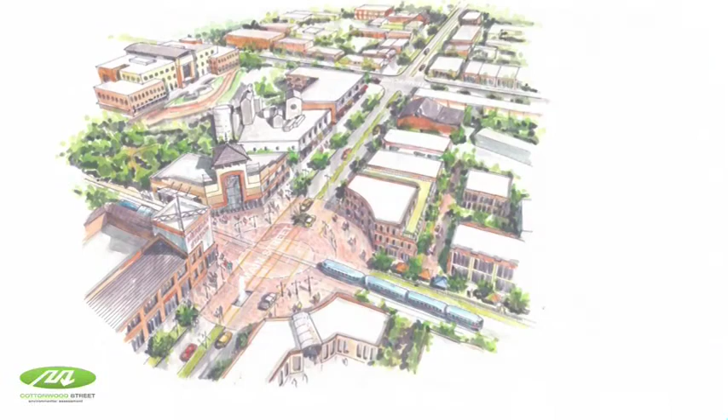Our downtown is such an important area of our community, and making efforts to improve and enhance the downtown is our goal in the upcoming years. We are focusing our redevelopment and economic development efforts on an area we are calling the Murray City Center area. We are proposing zoning changes to generate redevelopment in order to create an area with greater density that is a civic and cultural center for our community.

To determine the best route to take to make the connection, the City of Murray, UDOT, and the Federal Highway Administration are conducting an environmental study to examine alternatives and determine which will best serve the transportation needs of the city. The study is a 14-month process that started last September and is scheduled for completion later this year. Tonight, you'll be asked to examine 7 different alternatives and express your opinion on which of the alternatives best serves the transportation needs of the community.

The transportation objectives are: 1. Improve connectivity and reduce travel distance between the city's future city center district and the Intermountain Medical Center, TRAX light rail stations, and a future FrontRunner commuter rail station, the Fireclay development, neighborhoods on Box Elder and Hanauer Street, and the more than 100 businesses in the study area.

2. Improve access to commercial properties in the Murray City Center District. 3. Provide a safe, comfortable, and pleasant cycling and pedestrian route between major destinations. In evaluating each alternative, the study team is taking into consideration impacts to neighborhoods, historical properties, noise, pedestrian safety, and how best to enhance traffic movements in the study area.

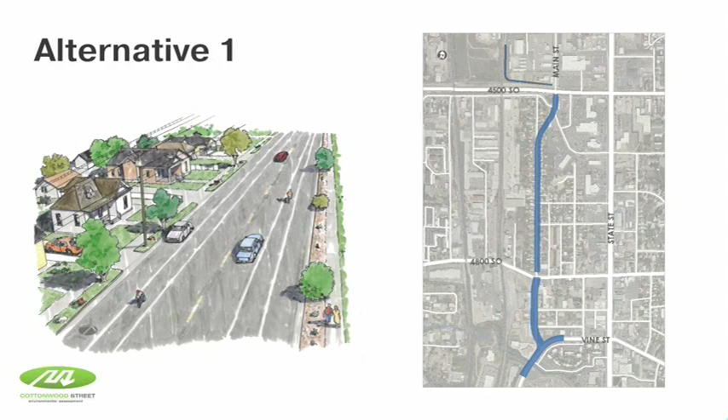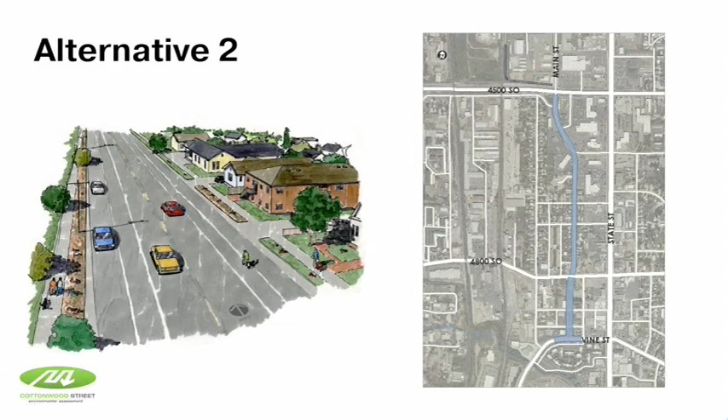Alternative 1 is a 3-lane roadway along the existing Box Elder Street alignment, with widening to the east side of the Box Elder residences. A majority of the homes on the east side of Box Elder would be relocated with this alternative. Alternative 2 is a 3-lane roadway along the existing Hanauer Street alignment, with widening on the west side of Hanauer Street. A majority of homes on the west side of Hanauer would be relocated with this alternative.

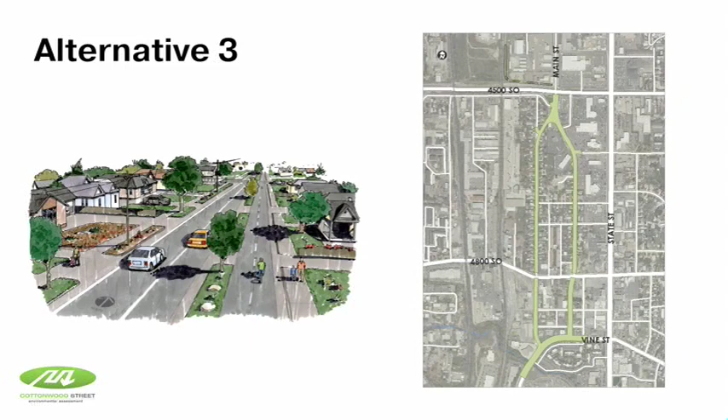Alternative 3 is a one-way roadway pair, also known as a couplet, using the existing Box Elder and Hanauer alignments. This alternative stays within the existing rights-of-way for most of the residential area and has the least amount of relocations. Alternative 4 is a 3-lane roadway along the new alignment that runs between Box Elder and Hanauer Streets. Several property relocations would be required with this alternative.

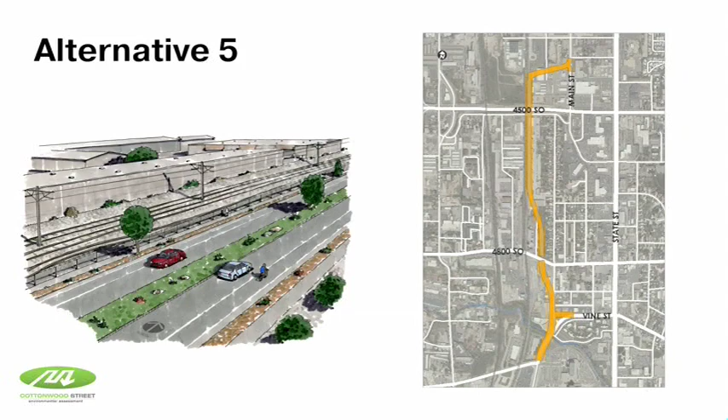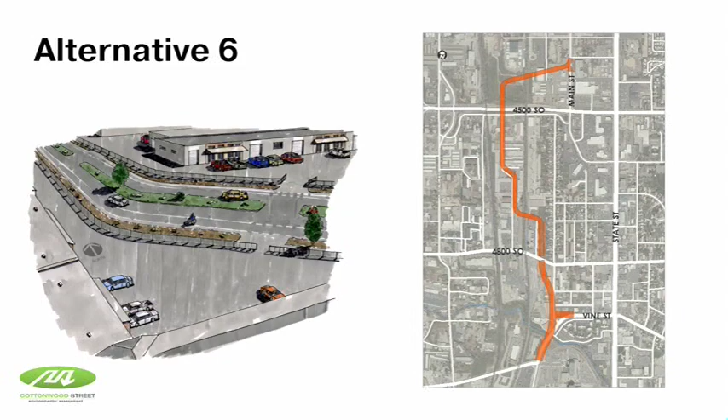Alternative 5 is a 3-lane roadway that runs along the east side of the railroad tracks with impacts to the commercial district. This alternative would require a bridge at 4500 South and would impact the railroad tracks. Alternative 6 is a 3-lane roadway that runs along the west side of the railroad tracks with impacts to the commercial district. This alternative would require 3 new bridges, 1 at 4500 South and 2 over the railroad tracks.

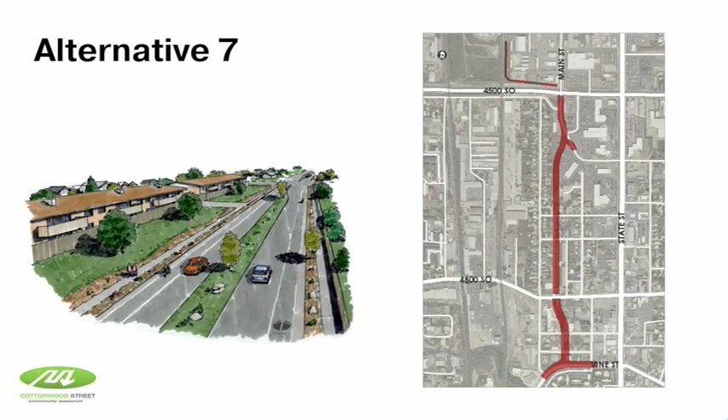Alternative 7 is a 3-lane roadway that runs between Box Elder and Hanauer Streets. This alternative would require several property relocations. For more detailed information on each of the alternatives, please visit the Alternatives display station at this open house.

The study team plans to determine a preferred alternative this spring and recommend to the Federal Highway Administration which alternative best fits the transportation needs of the area. Information about the right-of-way or land acquisition process is available at this meeting. See a project staff member for more information.

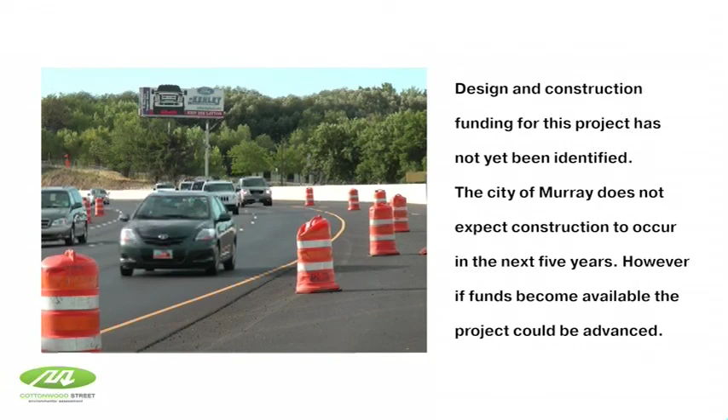Design and construction funding for this project has not yet been identified. The City of Murray does not expect construction to occur in the next 5 years. However, if funds become available, the project could be advanced.